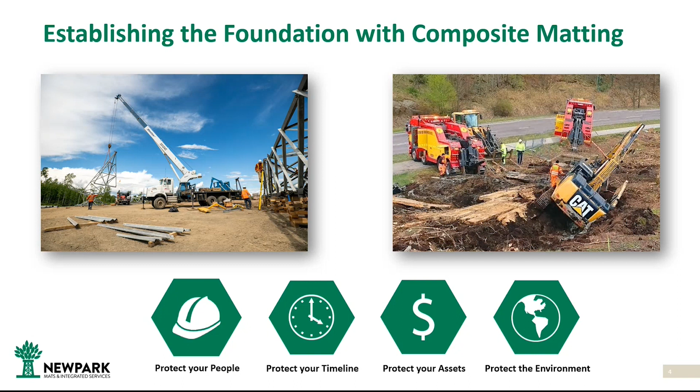So I'd first like to start off with breaking down what is a composite mat. So we can simply look at the definitions of each word that'll describe the product. So we'll first start with composite. A composite is made up of various parts or elements that'll be merged together to create material properties unlike the individual elements. So in this case, we're taking various blends of polyethylenes with impact-resistant material and specialty additives to compose a robust material that is strong in mechanical properties.

Then we look at the word matting. Matting is typically a floor covering, and it's used under an item to support and protect that primary ground. Matting is also used as a base structure or a foundation for something larger to be erected on top of it. So when we put these two words together, we're creating a product that is suitable for various industrial settings, and we come out with the heavy-duty composite mat. This heavy-duty composite mat is specifically a blend of plastics molded into a structural arrangement for a safe and rigid support for working personnel and heavy equipment on job sites.

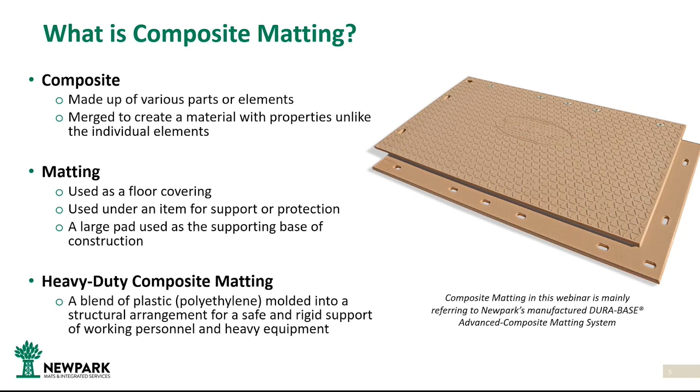However, if you take that same person's weight and you spread it over a larger area, then there's a reduction in pressure that that snow can handle. So this is exactly what a snowshoe does. Before, the snow couldn't handle the pressure from that person's foot or boots, so he sank.

Now, with the snowshoe on, that person's pressure is reduced and the snow can now support his weight and they're able to walk on top of the snow. So this analogy is exactly how a composite mat works, except the composite mat is going to have lots of higher weights and large equipment on top of it.

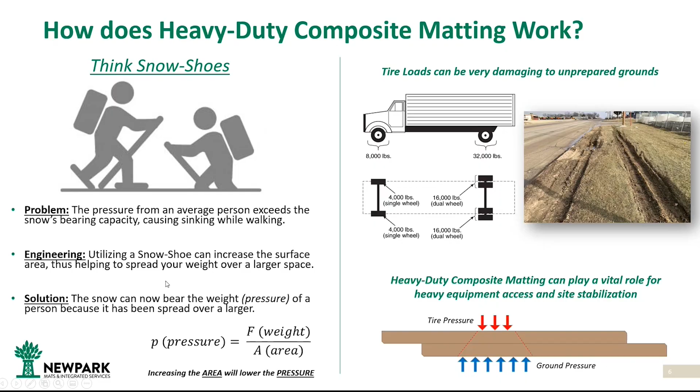Given the versatility of composite matting, it can be used in many different industries and for many different types of operations. Anywhere that needs to protect the ground or create a vehicle path, composite matting can be used. So not only is it safe for heavy equipment, but workers can easily work on top of it as well. The Dura-Base matting system creates a continuous work site that minimizes hazards for workers and helps to protect the environment.

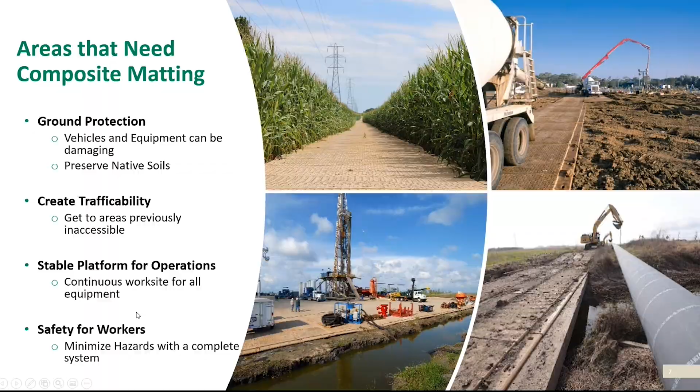Before a unique and sustainable matting solution came about, ground stabilization went through various different stages in the past. The first attempts at creating a stable ground were to use compacted fill material, whether this included bringing in new dirt to the work site, gravel, or rocks, and attempting to add more material in areas where the soil was weak, compacting it down, and then traveling on top of it.

Then it was noticed that trees had good flexural properties and could support vehicles when they laid them on the ground as well. So industries started laying various pieces of logs and lumber on this soft ground condition so that vehicles and equipment could travel throughout these back roads. Then finally, there was a little bit of innovation that came along and people started to create wood mats. So these are constructed out of many different species of trees, and they have various shapes and sizes, and some of them are bolted or nailed together, and some of them are entrapped by steel.

The disadvantages of using wood is that it has varying properties. It can easily be broken over time, and it has exposed metal that can harm personnel or equipment working on top of it. So finally, building upon all these previous solutions, the Dura-Base mat was born. The Dura-Base mat was the first composite mat in the industry, and it's the largest plastic composite product on the market. It was purposefully designed to create a dual-sided system for roadways and work sites.

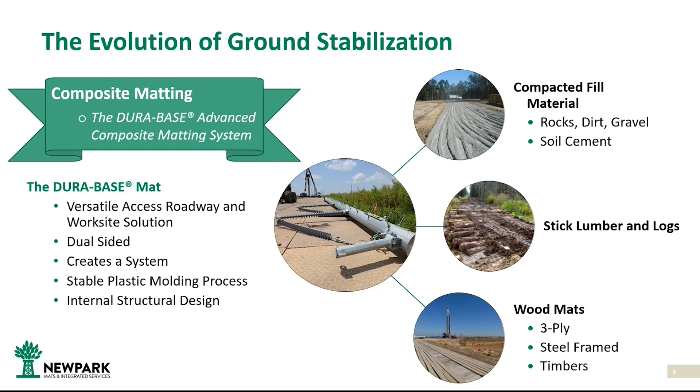The strength of the product is a combination of its internal design structure and its material properties, as well as its molding process. So this ground stabilization system is the longest lasting and most innovative matting solution today. There are many technical benefits to utilizing heavy-duty composite matting, and we'll highlight 3 of them here today. The first one is its remarkable compressive strength. The mat can support over 600 psi, or pounds per square inch, in pure compressive loading before it permanently deforms.

So today's vehicles and equipment come nowhere close to reaching this limit. Think about the car that you drive on a roadway to get to work. Typically, these cars average anywhere between 30 and 50 psi being exerted from the tires. You're driving next to an 18-wheeler on the highway. That 18-wheeler is exerting around 100 psi for each of its tires. Then you go into an industrial setting where there's large excavators or crawler cranes, and typically these pressures are below 10 psi when those vehicles are traveling. This is because they already have large tracks that the weight is being supported on.

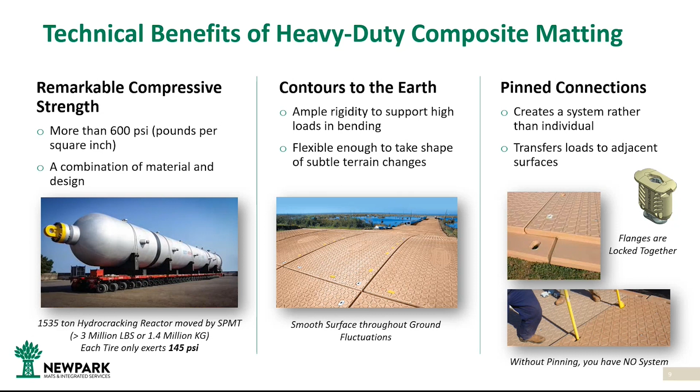We'll now jump into safety. Safety is the highest priority for Newpark's products and services. And in many toolbox talks or job safety analysis, we often use the phrase, use the right tool for the job. It can easily be a safety hazard if we were taking a screwdriver or a wrench and trying to beat a nail into a wooden post. We're not using the right tool.

It can be even worse if we're on a job site location and use the excavator that's nearby to grab a pallet full of materials and try to load it into an enclosed 18-wheeler. It might be able to get the job done, but not with ease. And disasters are waiting to happen when you don't use the right tool for the job. So the same is true when it comes to matting. The composite mat was specifically designed and manufactured for the purposes of creating roadways and work sites in subpar environmental conditions. So if you're using a product for its intended purposes, you'll likely be safer, more efficient, and more effective.

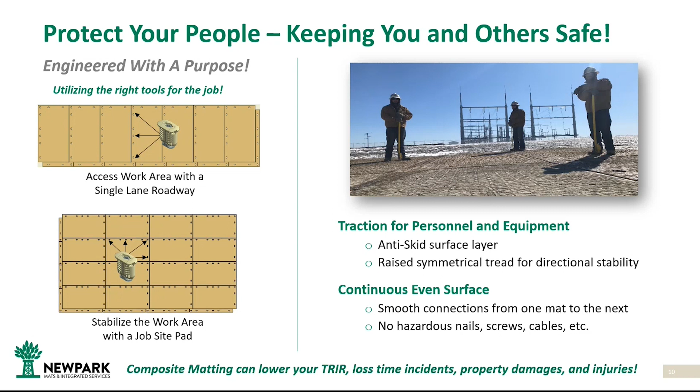Not only is it safe to use the right tool for the job, but it also helps when safety features are added to the product's design, right? The Dura-Base mat has a raised tread pattern on both sides of the mat, along with the anti-skid surface layer that helps vehicles and personnel gain grip whenever they're traversing across the mat. Just as I said before, when you connect mats into a system, you're creating a smooth, continuous, and even work surface. There's no protruding nails, no screws, or other metal objects that can cause harm to you or your equipment when you're using composite matting. So it just makes sense that composite matting is going to lower your TRIR and your chances of injury or property damage.

Time means money, right? So when you waste time on products that are not fit for purpose, or they're falling apart during the project, and you can't successfully rely on these products, then you're wasting your money or your company's money as well. So the Dura-Base mat was engineered for all-purpose weather conditions through computer simulated modeling and field testing. And it was followed up by a manufacturing process that has quality standards that meet the International Organization for Standardization, or the ISO 9001:2015 quality management standards. So this means that every mat produced has a dependable and traceable production history, ensuring that the mat will meet the specs set forth by its overall design.

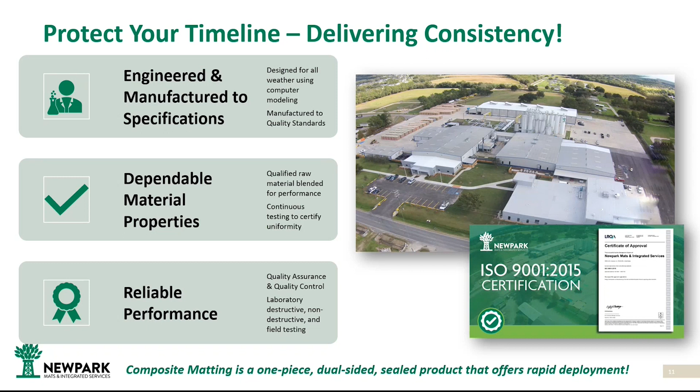Not only do the quality standards apply to the end product, but raw materials and composite blends are continuously tested to ensure uniformity and performance. So various other checkpoints throughout the process and after the product is produced also confirm a reliable field product. So we measure the mat, we crush the mat, we bend the mat, and we even destroy the mat to collect lots of mechanical data to ensure its performance, ensuring that it's not going to fail when it's applied in the right application settings. So knowing this type of consistency goes into the production of the Dura-Base mats can help our customers rapidly deploy the matting system for projects that need to conserve time.

Now, whether you purchase or rent or just have capital assets on a project, it's nice to know that composite matting is there to protect your investment. As stated before with previous safety features, composite matting can alleviate costly accidents or incidents with personnel and equipment when you compare it to the wood alternative. They also last an average of 5 times longer than wood mat substitutes. This means your matting investment can be repeatedly used on many jobs over decades.

You'll also reap the advantages of reducing your job site preparation time and cost, as well as your post-job restoration operations because of the performance of the Durabase mat. When trucking mats to and from jobs, you can maximize the amount of matted surface area per truckload, estimating around 4,200 square feet of surface area on a single truck. This is the largest ground stabilization coverage per truckload on the market today.

On top of all these benefits, the mat material itself is 100% recyclable at its end of life. Therefore, the composite mat is a gift that keeps on giving once it's ended its life.

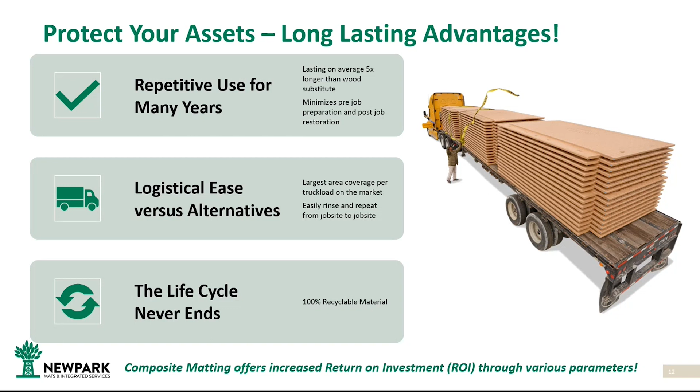Lastly, the composite mat is here to protect the environment in which we live as well. The performance of the mat works in conjunction with Mother Nature to reduce its impacts and minimize its disturbance to those native soils. Because of its engineered design and manufacturing process, the mat is a sealed product that features materials that can easily be washed. Therefore, contaminants or invasive species cannot be absorbed into the mat, and they can properly be disposed of or left on the job site to prevent site-to-site pollution.

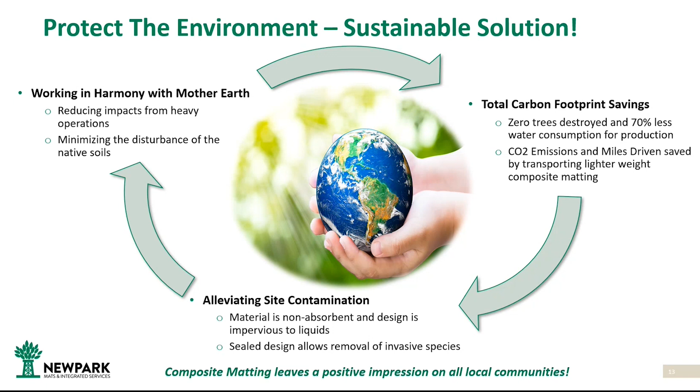Carbon exposure is also reduced with long-lasting composite mats. Zero trees are destroyed for its production, and roughly 70% less water is consumed from its closed loop process when compared to wood mat production. Because of its lightweight and transportation advantages compared to the other alternatives, fewer trucks are on the road. Therefore, we're reducing the CO2 emissions and the miles driven by our logistical partners. So composite matting leaves a sustainable and positive impact on all local communities that we work in.

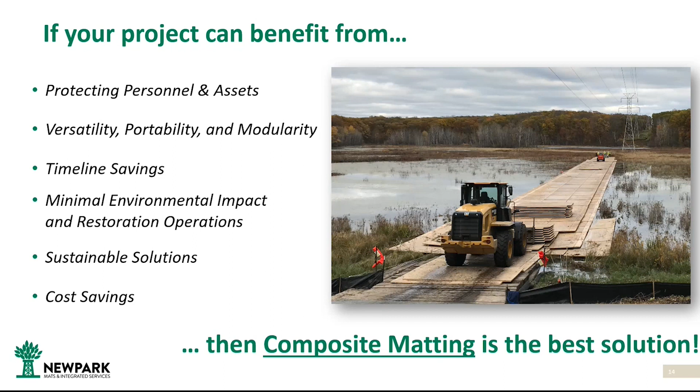So in conclusion, I'll wrap it up with: if your project can benefit from protecting your personnel or your assets, if it needs versatility, portability, and modular ground stabilization, if you want to protect your timeline, minimize environmental impacts and restoration operations, have sustainable solutions, and save cost, then it's likely that composite mat or the Durabase matting system is the best solution for you.